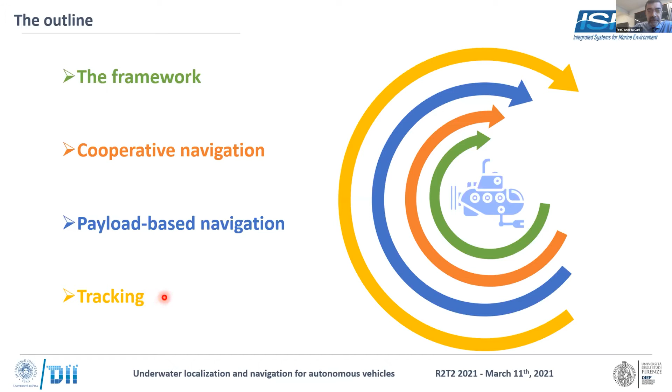So the motivation for underwater robotics, I think, is possibly evident to the whole audience. Using robots underwater can help in reducing the number of personnel involved. In turn, it can increase operational safety; you don't need to put people at sea. It can mitigate the ecological impact; you don't need to have big ships at sea. And all of these help also in reducing the costs of missions at sea, which are huge.

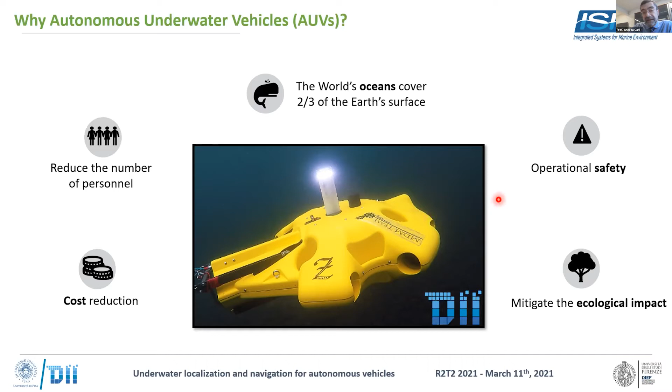But one of the problems that autonomous underwater vehicles have in their environment is that of localization, to understand where they are. Underwater, you don't have all the facilities that you may have on Earth, in air, to localize yourself. It's a GPS denied environment. You cannot use electromagnetic waves unless you're going to very short distances. So navigation is still a non-trivial problem in the underwater domain.

The trend is going from large single autonomous vehicles, the famous Hugin, possibly the first one that had commercial use at the beginning of this millennium, towards teams of smaller, more flexible robots that can be underwater or surface autonomous vehicles. There are a lot of pluses for using teams of small size, low cost vehicles with respect to their larger and older brothers. But there is a minus.

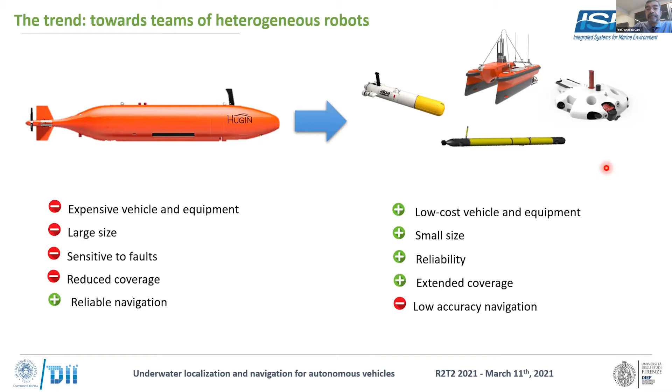While with small size, low cost vehicles, you cannot afford the high cost implied by reliable inertial systems, for instance. So some of the classical navigation schemes that can be implemented for large or costly vehicles may not be implemented with small vehicles.

Just to briefly review, acoustic positioning systems go from long baseline systems, in which you put acoustic beacons over the domain of navigation and essentially do triangulation to localize the vehicles. Short baseline systems still employ acoustic beacons, but with less separation between the beacons, while ultra-short baseline systems use the principle of acoustic arrays to get estimates of range and angle from the reference system to the vehicle.

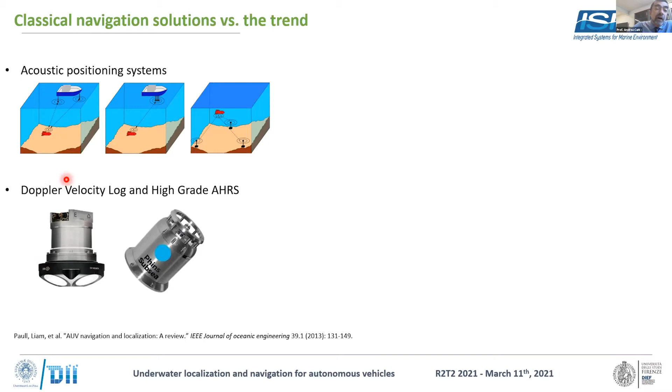High-grade inertial navigation systems are those installed on large vehicles. On large vehicles, you have also Doppler velocity logs. Even Doppler velocity logs can have by themselves a cost that can be compared to the cost of an entire small size vehicle, something like 20 or 30,000 euros.

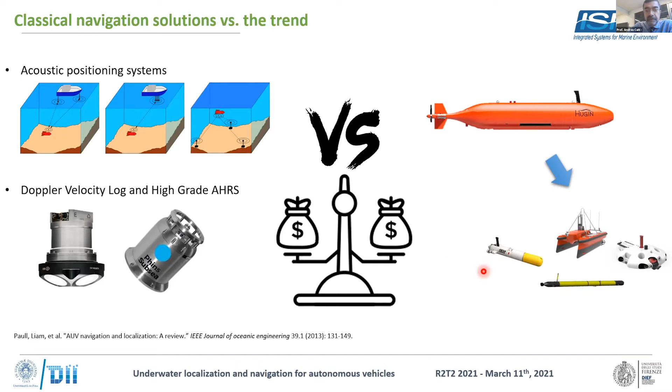So our research trend that I'm going to present now goes towards exploiting the possibilities of using low-cost systems in trying to achieve a navigation accuracy equal or at least close to that of larger systems. The first item is that of cooperative navigation.

In this case, we are exploiting a team of vehicles or different assets that communicate with each other through acoustic modems. Now, state-of-the-art acoustic modems have become capable not only of transmitting messages, but also to estimate at least the relative range of the vehicles in communication, and also, in some cases, the direction of arrival.

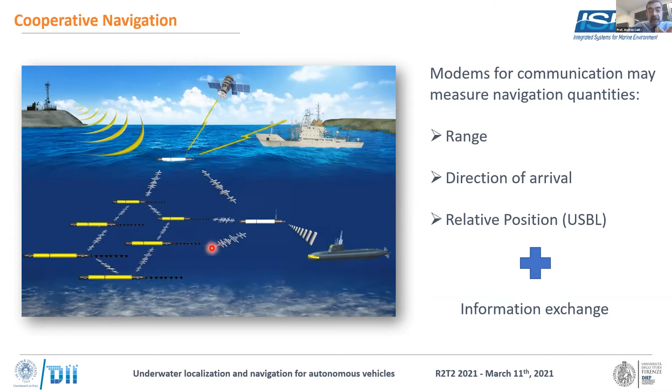So now I'm going to present some results from the field in a joint experiment we had with CMRE, the NATO Center for Maritime Research and Experimentation. The experiment has been done in deep water. Deep water means that you cannot use Doppler velocity logs, even if available, to measure the velocity of the vehicle with respect to the seabed.

The goal of the experiment was to estimate the position of an autonomous underwater vehicle and the sea current velocity in the operating area. What are the available sources of information? Onboard sensors include velocity with respect to water, heading angle, the information on the sound speed for acoustic transmission, and depth.

And from the acoustic network, that is from the other members of the network, the range and bearing from the other team members, some other nodes' positions that are communicated through the exchange of information, and its own absolute position through ship-mounted USBL systems. Now, note one thing. This information from the acoustic network is not always available. Otherwise, with the last point, we would have solved the problem.

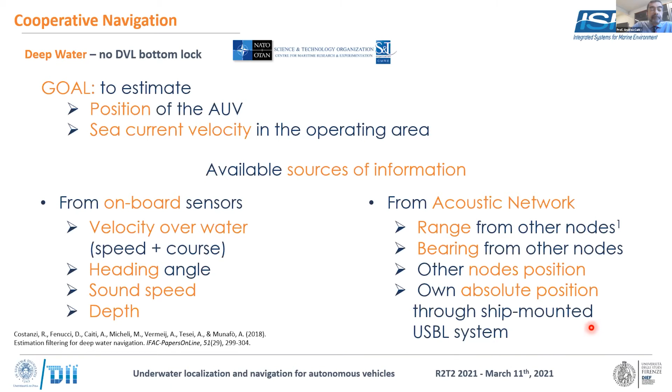The information comes to the vehicle at asynchronous times, and in particular, the own absolute position does not come often. It comes every once in a while. How is this done? Well, each member of the team has implemented on board an extended Kalman filter that is designed with two basic assumptions. One is that the sea current is constant in the operative area.

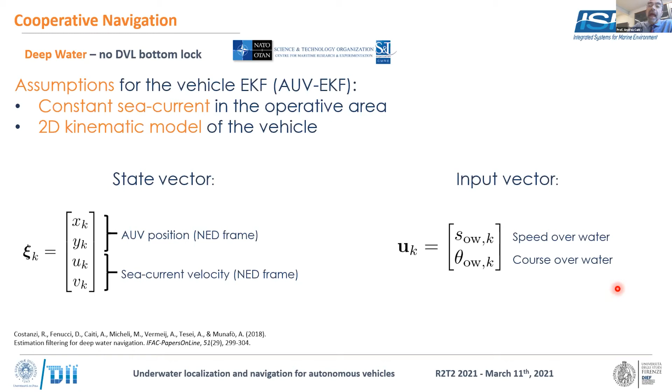The other is that the model of the vehicle is a two-dimensional kinematic model, so you don't change your depth during your mission. The state vector is the absolute position of the AUV and the sea current velocity. The input vector is speed over water, course over water, your heading, and of course the additional information that comes from the communication system.

You have also other filters running in parallel to the main one, in which you try to track the other agents in the network. Now, the filter has to deal with outlier rejection, since all the information from the network, range and bearing measurements, comes acoustically. You may have wrong messages, wrong range estimates, wrong bearing due to interference, especially due to multipath phenomena. This will cause the reception of data that are indeed outliers, and you have to reject them, of course.

The other point is that even when you get information from the network, that information is related to a past time with respect to the present time. So there is a latency in the transmission of information and in the gathering of data. And our filters do take into account this delay in measurements. As I said, not all the measurements arrive regularly, there is irregular sampling, and you have to deal also with this asynchronous arrival of information.

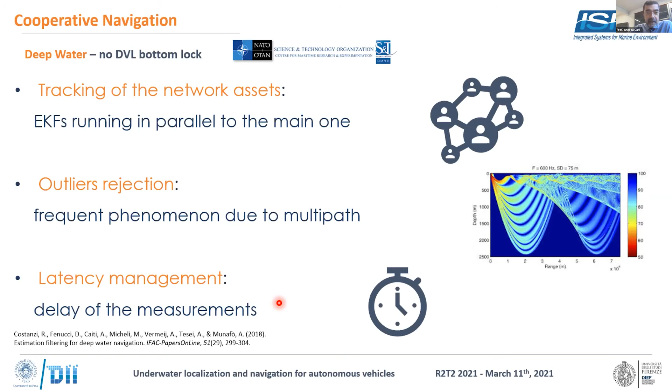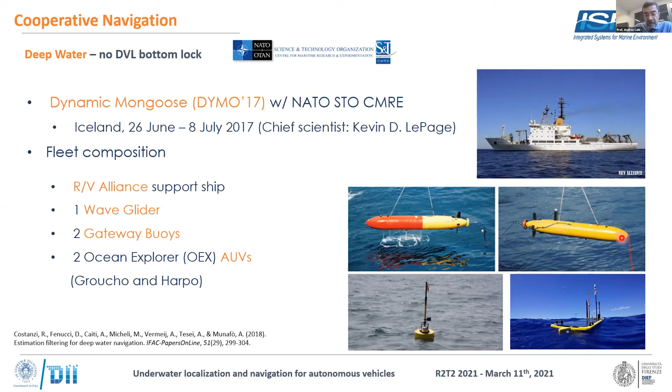So the experiment we did with CMRE was the Dynamic Mongoose cruise 2017. Chief scientist was Kevin LePage. The team was composed of a surface ship, one wave glider, which is an autonomous surface vehicle, two gateway buoys that are autonomous surface assets, and two AUVs, the Ocean Explorer AUVs of CMRE, on which our filters have been implemented.

Okay, now we don't have a ground truth available for this experiment. So what we can do is compare the estimated navigation with the reference navigation that was prescribed to the vehicle. The dive had a duration of approximately 4 hours, 16 kilometers of travel distance, and the error between the estimate and the reference is never over 150 meters throughout the whole mission.

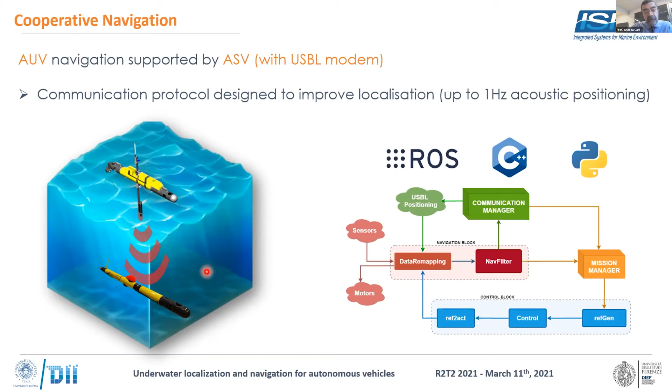The vehicle at the surface, of course, has access to satellite information, and the measured position is sent back with a message to the underwater vehicles. The underwater vehicles will receive that with a delay. They may not receive all the messages sent from the surface vehicle, so the underwater vehicles actually implement an extended Kalman filter, as the one explained in the previous experiment.

And here it is possible to have a ground truth from the onboard navigation systems, because the experiment we did is in shallow water. We use the DVL in this case not as part of the navigation on board the system, but to acquire data for ground truth.

So here you see the navigation from the onboard navigation system in blue. Red is the USBL measurements as received by the underwater vehicle, with some gaps that are due to lack of communication. Here you see the GPS trace of the surface vehicle. So the surface vehicle doesn't need to follow strictly the underwater vehicle. It is sufficient that it stays in the area and within communication range with the vehicle.

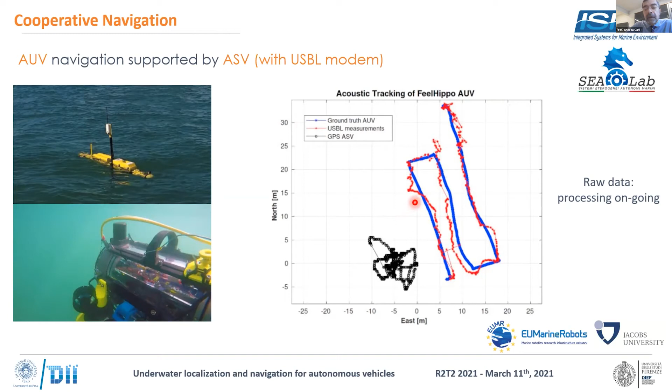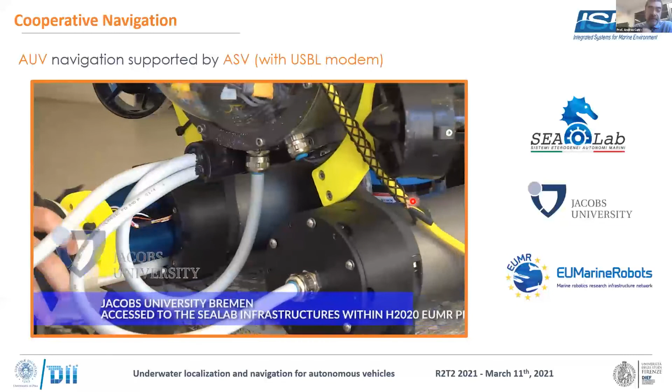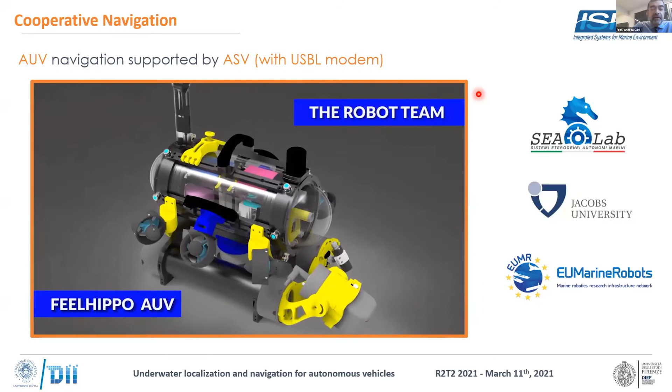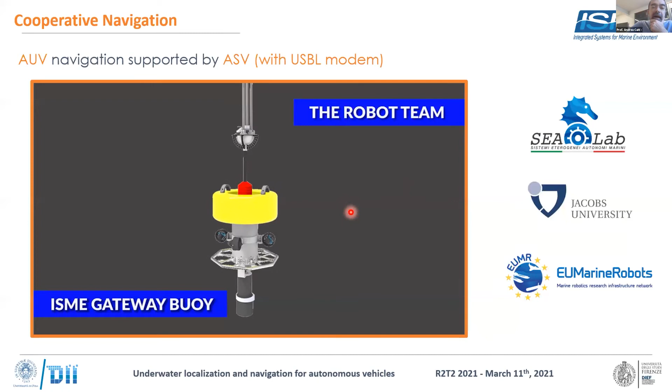This experiment that I just described has been extended through a collaboration with Jacobs University of Bremen. Actually, this was part of a European project on sharing research infrastructure. So the SEALab, the joint laboratory with the Italian Navy that I talked about before and that you were seeing in the video, has been used as a shared infrastructure for other research teams throughout Europe to apply for experimentation together with us.

And the experiment was carried out with, let me see if I can move.

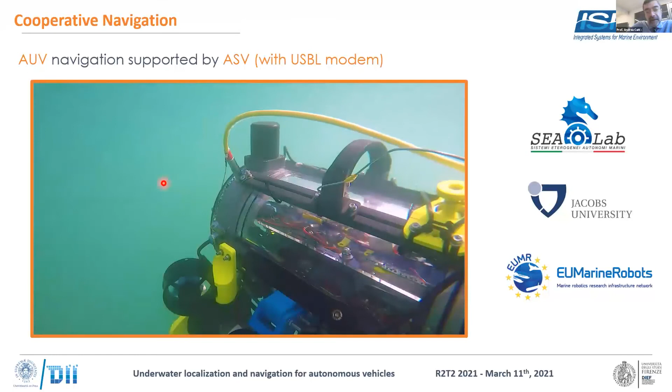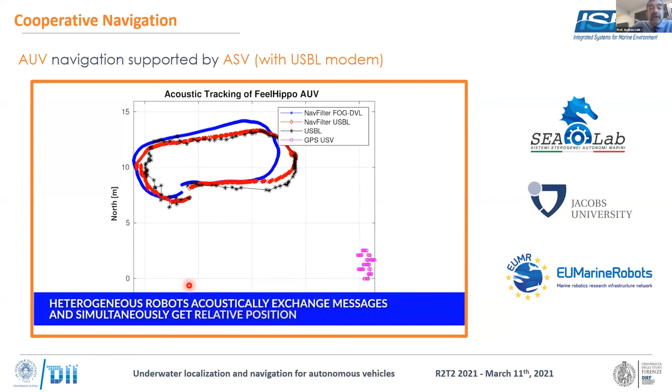Okay, I may not try it, but essentially we had two surface vehicles and two underwater vehicles sharing the same mission. FeelHippo and the X300 were underwater, while the two vehicles that we still call gateway buoys were at the surface, gathering information to be shared through the communication network with the underwater vehicles.

Okay, just another glimpse of the SEALab facilities. And one of the things that we were looking at in the mission was also the automatic detection of targets. This was done with a forward-looking sonar, and this brings us to the next part of the presentation, that is payload-based navigation.

As you see, the experiment was a navigation experiment, but the vehicles had a payload to map the bottom with a forward-looking sonar and automatically detect features on the bottom. This is something that is done quite frequently in underwater applications, seabed mapping and exploration. The point is, can we use the payload data to increase the navigation capability of the vehicle?

Now, this is a tricky aspect. I've been teaching my students for a long time: do not mix the payload system with the vital vehicle system. That is, the vehicle has to be capable of navigating and coming back home without the use of the payloads.

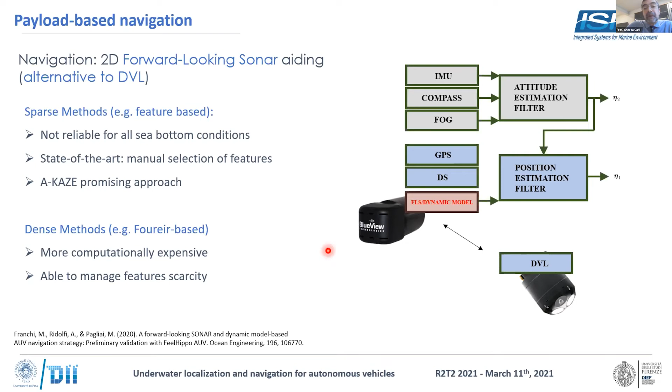And in particular, in the next slides, I will try to show what we have achieved so far in trying to use the forward-looking sonar and the recognition of a feature on the bottom to estimate the velocity of the vehicle with respect to the bottom. That is to use the payload to substitute the Doppler velocity log.

Here we have an example. We're comparing three things. Some model-based approach in which we have a nice dynamical model of the vehicle, and we use that in traditional odometry. And the blue one is when we use the forward-looking sonar as the instrument to measure velocity. And this is the error in estimated navigation during short missions, and at the end you have also the comparison with the GPS at resurfacing.

Now, the vehicle had also a DVL system that is not used in the navigation filter, but it is used to compare the results and obtain ground truth. And you see that the forward-looking sonar-based navigation can compare with the DVL slightly better than the model-based approaches. The model-based approaches give information that is nice and smooth, but at times inaccurate with respect to DVL.

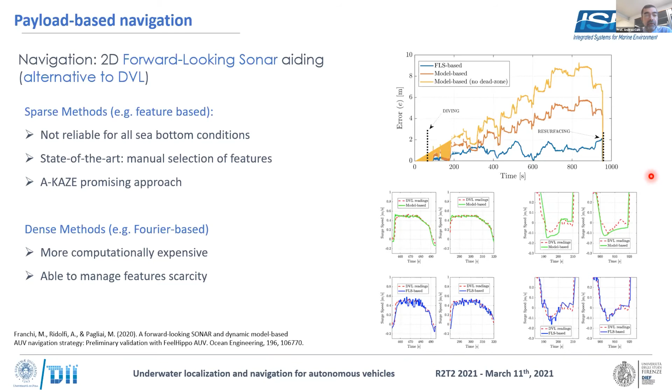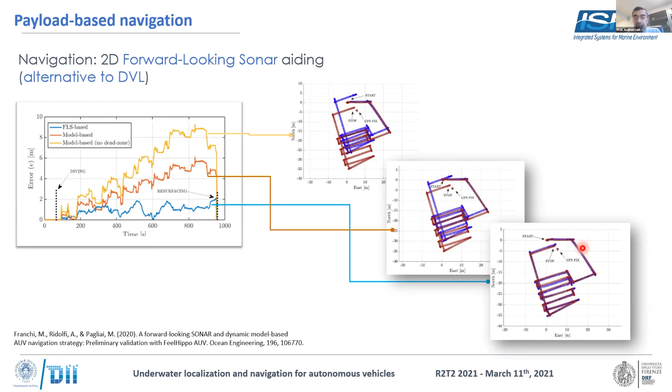And here you see the ground truth in blue and the resulting navigation with model-based, with an improved model-based, and with the forward-looking sonar. And you see that the forward-looking sonar visually does compare much better than the other two methods.

Payload-based navigation, this is simulation only for the moment, but where it is possible to use optical systems, that is cameras, we are looking at using the optical system as we did for the forward-looking sonar, that is to measure the velocity with respect to the bottom. And to do so, we need also to use an echo sounder, an altimeter, to adjust the scale factor of the images that you may get with a single camera.

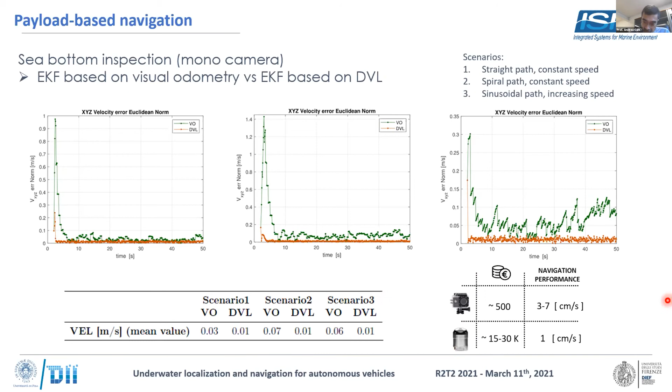I'm finishing my time. So here you have the mean value of the error, visual odometry, DVL. And here you have a comparison of cost of the instrument and navigation performance. So the point of this slide is that actually you can compromise a little bit navigation performance, but save quite an amount of money for the sensor. Of course, optical systems will work only in limited situations, while the DVL in bottom lock will work for almost any kind of bottom.

Okay, I had here other images. Just a brief point on the fact that you can use visual odometry for hull inspection. We're trying to do that as well.

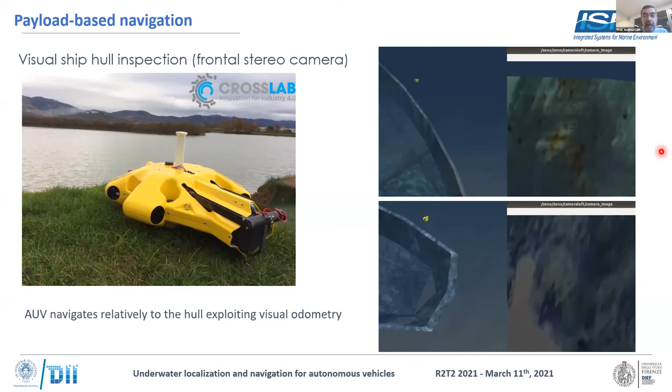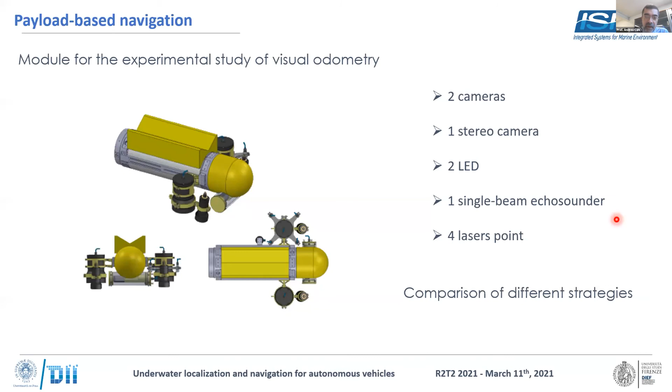We're going toward systems, or comparing systems with stereo vision and laser systems. Laser systems are actually another payload that you want to have when you inspect a hull, to correctly represent all the possible features that you may want to see on the hull.

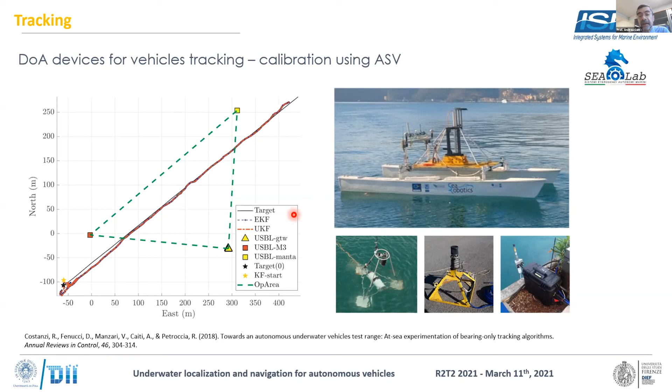I think I'm running out of time, so I will not talk about tracking, just to say that we have essentially put together a system for tracking and comparing different navigational procedures. Here is a result in which we compare extended Kalman filter and unscented Kalman filter.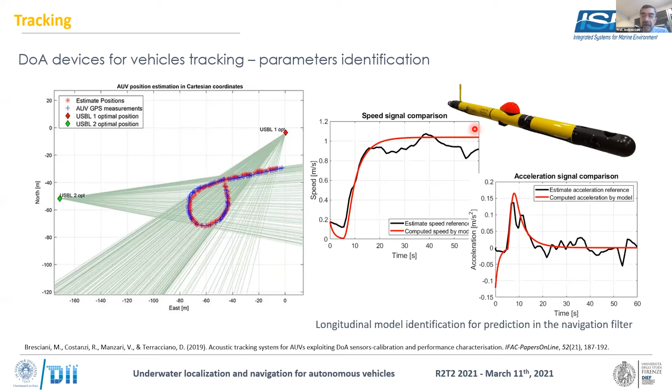And we use this tracking system also for estimation of the dynamical model of the vehicles. Here is a result of a simplified model of the vehicle, prediction of speed, estimated speed in both cases, and the results are actually quite good, I would say.

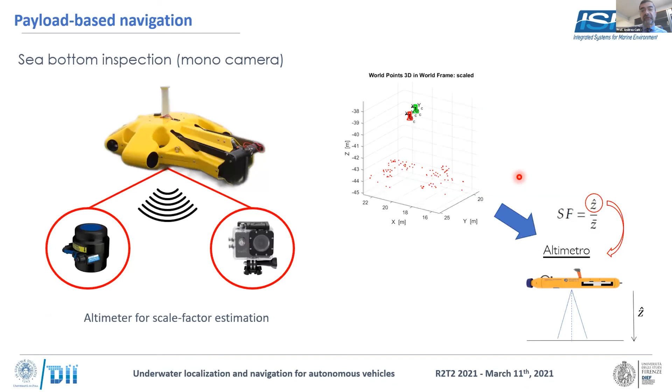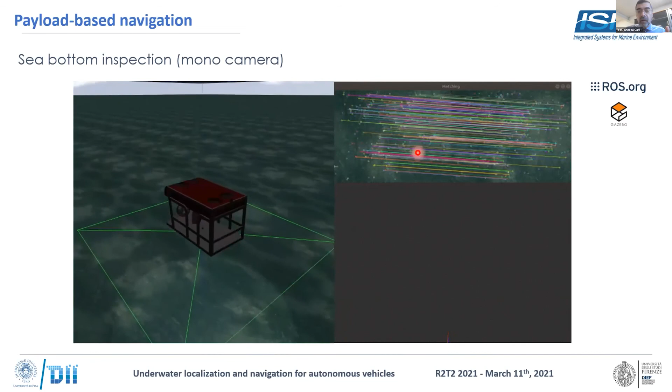So essentially, these are images in which you try to identify the same feature in one image and the next, and estimate; it's almost an optical flow, if you like. And you see that there are some outliers as well, as you would expect in optical flow, in which you try to get one salient feature and see it in the next image, and from that get the velocity.

Okay, deep water, shallow water. Of course, optical systems or even low-cost forward-looking systems can be used in shallow water or very shallow water. In deep water, you will not see the seabed, either with a DVL, an optical system, or cheap acoustic systems. You may look at the seabed even at some distance, but to get the necessary resolution, you will need quite an expensive sonar system to image the seabed.

So in deep water, either you pay the cost of sophisticated onboard navigation systems that will drift anyway, that is, you may delay the drift but not avoid it, or you have to go with cooperative navigation with some surface asset to recalibrate your system every once in a while when communication arrives. The simplest cooperative system is one with a surface vehicle and an underwater vehicle. But you may have a more complex system with just one surface vehicle and networked transmission of information and achieve precision for all the agents in the team.